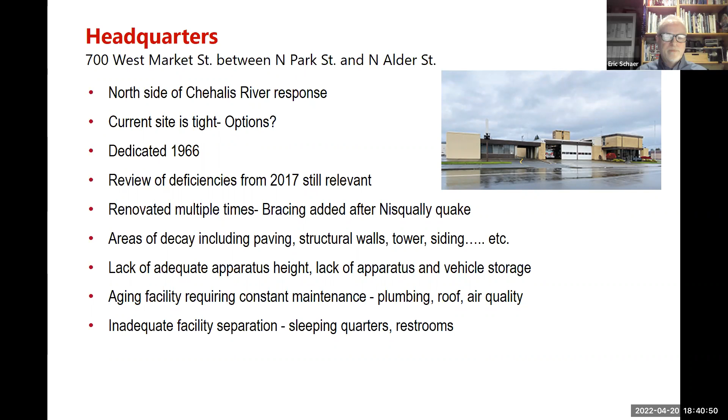The South Aberdeen Fire Station - this is the priority station for the department, so that's why I put that in bold green up there. It's my understanding if nothing else happens, they really need this one the most, so that's why that's there. This is a smaller station, of course, built in 1966 - both stations were built about the same time. This one has 3 bays, but it's actually only operating with 2 because there's workout equipment on one side of it.

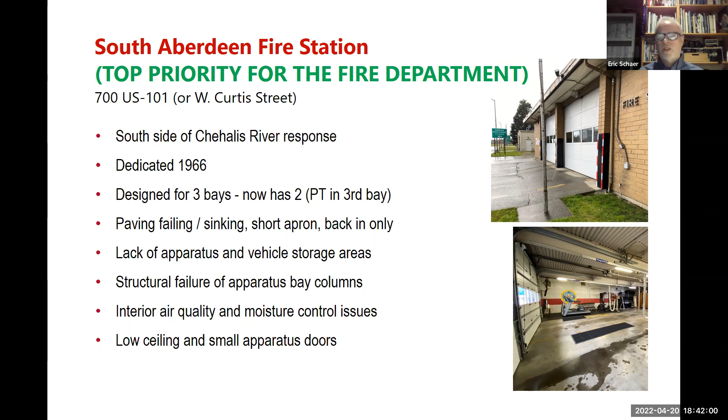There's lots of things happening with both of these stations that are showing age. I just listed a few of them - the paving, the apparatus have to back in, the front apron's very short, so by the time they clear the bay, they're already in the street, which is not something you really want to do if you can help it. Low ceilings - the apparatus doors and the ceilings in the bays are very short compared to a normal station these days, so the fire trucks actually have to be ordered and put together in such a way that they can fit in there.

I wanted to talk a little bit about this. It kind of scared everybody a little bit when we started this, but it turned out to be fine. So it was an educational process for, I think, everyone.

Our engineers got very involved in this, ended up talking to the state. We had a couple of meetings with them, and the code changed in the middle of doing this report, where they increased all of the tide lands and the requirements. So essentially what they were telling us is that where you see the yellow on the screen, there could potentially experience a 9-foot wave if the tsunami was triggered by a large enough earthquake. That was a little surprising to me, how far it came in, and the impact.

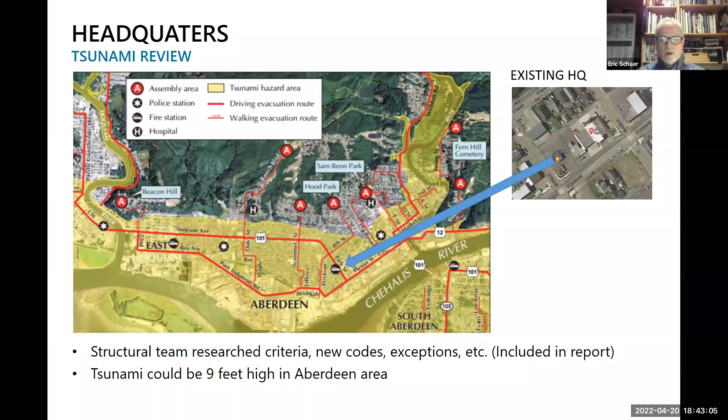And you can see where the fire station is there, and from the arrow, it's definitely in that zone. Next slide, Chief.

This is just showing the map of where the South Satellite Station is. Again, it's right next to the river. There is a wall there to protect it from flooding, of course, but this was the impact zone to that 9-foot wave. As I mentioned, last May, nearly a year ago, while we were working on this, the state adopted the new standards. So we were like, okay, are you serious? We have to try to design a fire station in Aberdeen to withstand a 9-foot wave.

Essentially, after we went through all of this with them, they said no, even though it's categorized as a 4 for a tsunami, they are allowing the local jurisdictions to just make that decision themselves, whether or not they really want to do that. It would nearly be not impossible, but it would be very expensive to try to design a fire station to withstand a 9-foot wave. You'd have to build a wall around the site.

The other interesting thing about this is that once the water comes in, it leaves after that, and so it's also going to be dragging things with it. So you have impacts of even a car slamming into your building and things like that. There's all kinds of stuff that could potentially happen.

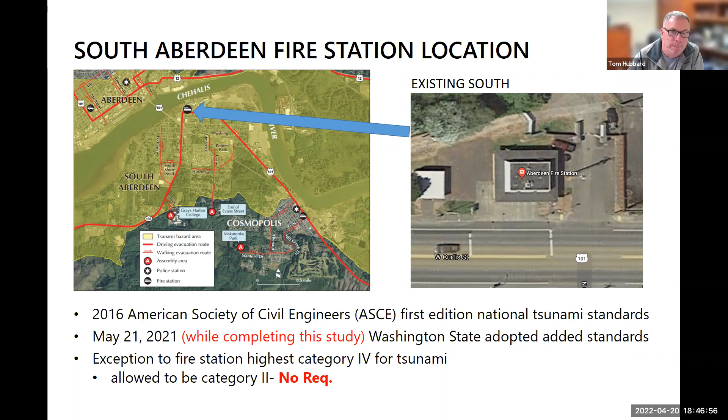Great, thanks, Chief. You can go to the next slide.

Again, as I mentioned, that was a very interesting process we went through. We talked about it for, oh gosh, it was probably 2 or 3 months. We went back and forth on what we were going to have to do. And the outcome of that basically came out that we didn't really need to do anything.

Fire stations are still category 4 in terms of earthquake design. So when you design a new station or do upgrades, they're essentially the last thing standing, as I always try to say, because they are the emergency responders. So let's assume you didn't have a tidal wave, the building would still need to be able to get the apparatus out of it in an earthquake to respond to your community and things like that.

So going back to the approach that we took, what were the takeaways? We toured the building, had a lot of good discussions with the fire department and the city. You guys as a city have been very helpful in us understanding some of the codes we needed to talk about, and location of the building. It's been a great process from my perspective in teamwork.

So we started looking at, okay, we've got some fire stations. What are they missing? What are some of the key things? There's some obvious things, given when they were built, advancements in technology nowadays. COVID kind of caused this, but we're all able to get on a computer and have meetings now. It's almost a little too easy. We're having multiple meetings a day now. We never used to do that.

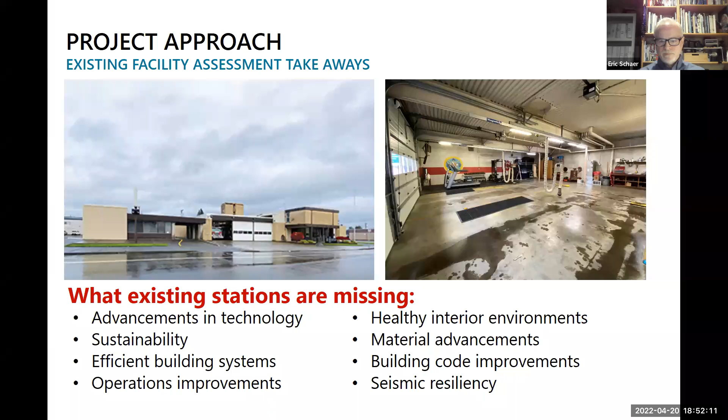So normally what we would do is we start talking about the needs assessment and what the fire department actually needs to do in their new facilities. But I wanted to quickly run through some of the current trends in the fire department, just so you guys all have an idea of what we talked about when we met with the fire department, to let them know what's going on out there and what things you might consider when we start the design. Next slide, Chief.

So I mentioned response, turnout. What are they doing? What gear do you have? How do you want this station to operate? We've done studies with other departments actually tracking time. If you get up and have to do certain things, how long does that take you? How long does it take to put your gear on and get in the apparatus? How can we help with that from a facilities perspective? Next.

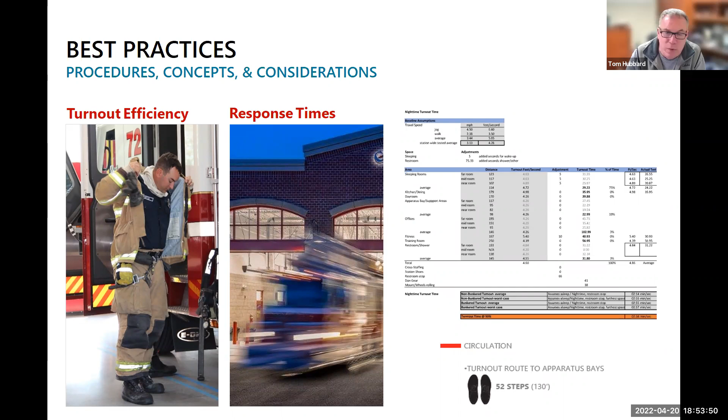There are NFPA guidelines on what we call turnout times, and it's different for emergency medical. It's a minute or less from the time we receive the dispatch to the time we're going out the door. For fire responses, because we're putting on our turnout gear, it's 2 minutes. So no matter what time it is, whether it's 8 in the morning or 2 a.m., when the tones hit, you either have 60 seconds or 2 minutes to get out the door, and we track that. The rating bureau tracks that, and it's a standard that we report on in our annual report. Thank you, Chief.

The healthy in, healthy out concept I mentioned, we've been doing it for probably 10 years, but there's a lot of departments that are not familiar with how this operates, depending on how old the facilities are and how sophisticated the department might be. And again, it's about controlling those contaminants.

When someone comes back from a call, it could be just something simple. I was talking to Chief Hubbard about this as well. My nephew's an EMS guy down in Vegas, and he holds back on the stories, but he's had to step in a few things when you go to a call, and even though he's not fighting fire, he's coming back. He'll try to wash his shoes off before he gets into things, but you certainly wouldn't want to wear those boots inside your house when you get home.

So there's just things that we want to provide: airlocks, places for people to wash off their boots, places for people to wash their hands, and then identify those spaces as we start designing the facility. Where are those? Where's the most convenient place that someone's going to be able to do that? Because old habits are hard to break. And if we want to make it as easy on the department as possible to get the crew to do something, a hand washing station right near the door they have to go in is going to be better, we assume, to get somebody to wash their hands or use a sanitizer station.

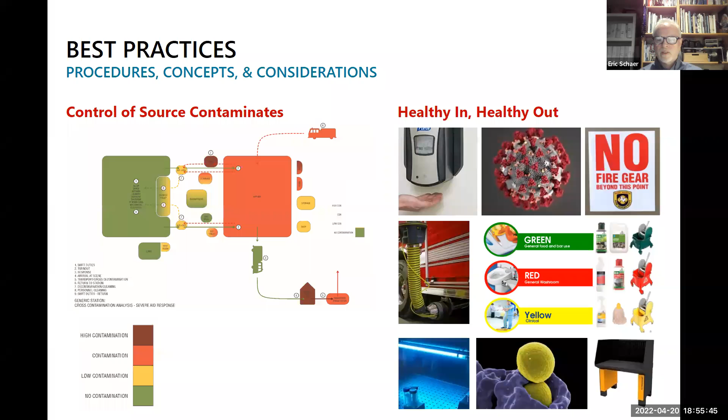The other thing in terms of health and wellness is something that seems very simple, but sleep health. You can imagine, as you probably know, these guys are getting called all day and all night. So you get woken up at 2 o'clock in the morning and then you don't get back until 4:30. You've got to be able to have good sleep or you're just not going to be able to function appropriately. So how can we better get it so that the crew can sleep better?

Well, one of those things, pretty simple: we started putting the lockers outside of the building, outside of the sleeping room. So if somebody comes on shift and they want to go work out or get their gear or something, they don't have to go in and wake the other person up. So there's some simple things like that.

Downtime, kind of preventing firefighter and emergency responder burnout, giving them places to just go hang out where they can decompress. It could be that they just came back from a really bad call and they just need to go hang out. So you'll see fire stations, almost every single one of them, have interior day rooms and outdoor spaces. They live there. It's kind of their house for a few days, and then they can go home and come back again. So there's a considerable amount of time as an emergency responder that you spend at these facilities.

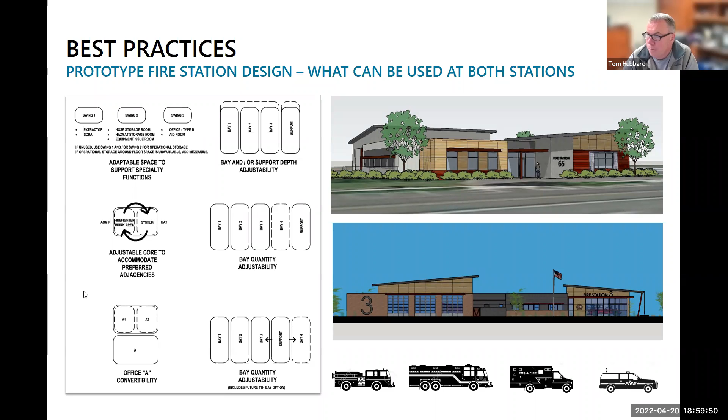Thank you, and that was my main point with this slide. You can go to the next one.

I mentioned too, this is up to you. I've been in a department one time where the chief, for various reasons, and he had good reasons, didn't want to tell anybody they were building a fire station in this particular spot because he didn't want to freak anybody out. Well, the sign went up and we had a public meeting, and we had to face the music. There were a lot of upset people who felt they weren't informed appropriately. So that's not really on us, but us and the fire department and you guys as a city have to make that decision.

But we've had a lot of experience sitting down with the public, having some fun meetings where we stick up little tabs on what everybody likes to see. We'll say, okay, this is the site that had to be picked and there's reasons for that, and we can explain that, but what do you want the outside of this to look like?

Well, what color do you want the fence? Because there's certain things you can do with the public where you don't really want them designing the inside of the fire station, but if somebody wants a white fence versus a brown one, or a certain kind of vegetation, things like that, we found great success in communicating with the public about what they can participate in. Then they feel a part of the process, so it works out really well.

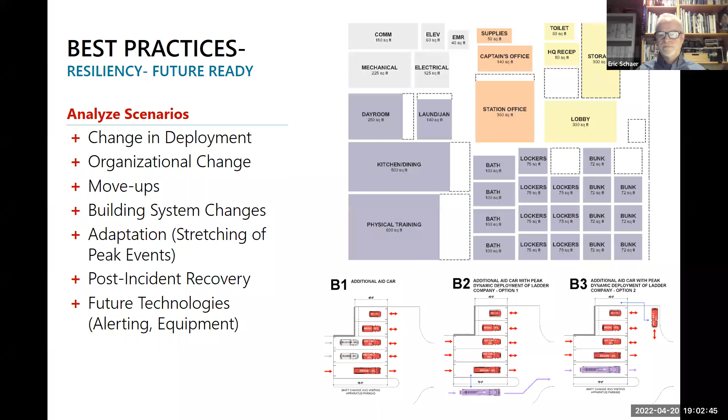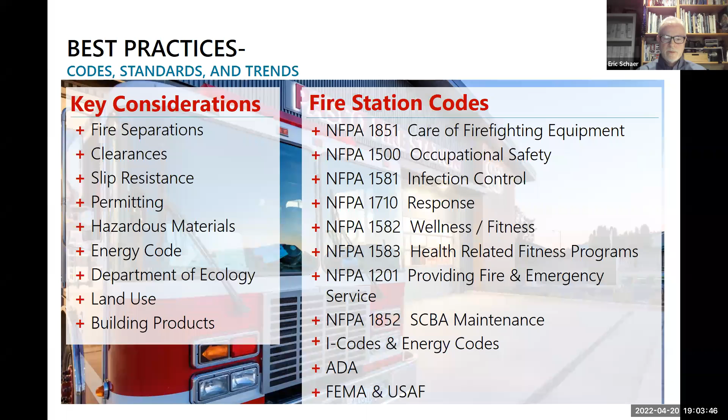There's new energy codes - the energy code just got increased this last year. There's certain things we have to do now with the outside of the building and the envelope that we didn't have to before. Most of the time we did it anyway, but now we have to. Slip resistance is required, and we can't let people fall down in the bays, so there's certain things we have to do with the concrete in the apparatus bays. Thank you, next slide.

Okay, so now finally, after all of that, we got together with the department and said, okay, we understand what you have, we understand how it's operating, we understand what the deficiencies are. We've had discussions about trends in fire service design. So, Chief, fire department, what do you need? What do you want to do with the new one? You're starting from scratch - let's talk about what's going to work for you moving into the future.

And so that's what this is - a small piece of the report we put together. We did this for all the different spaces we thought we'd need in the building, and came up with square footages based on our experience and trends and the needs of the department. We put one of these together for each of the facilities. So if you can go to the next... anyway, before you do that, sorry, if you could back up.

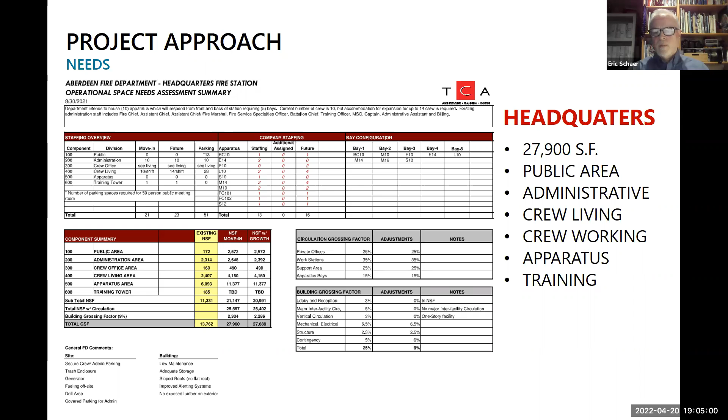We came up with 27,900 square feet for the headquarters - that was the number based on all of those needs. For the priority station, the south station, that ended up being about 12,135 square feet, calculated based on all of those needs. Next slide.

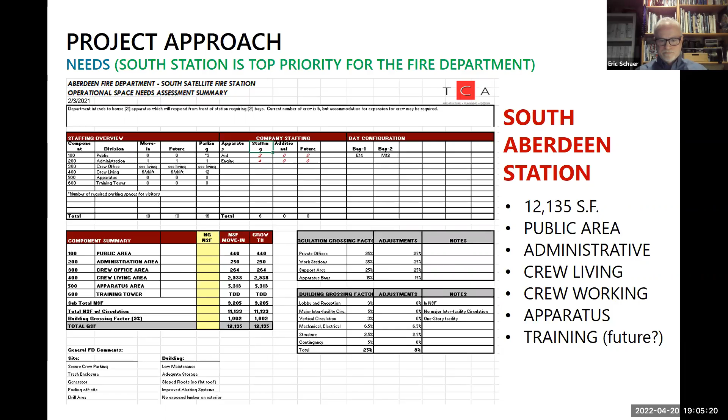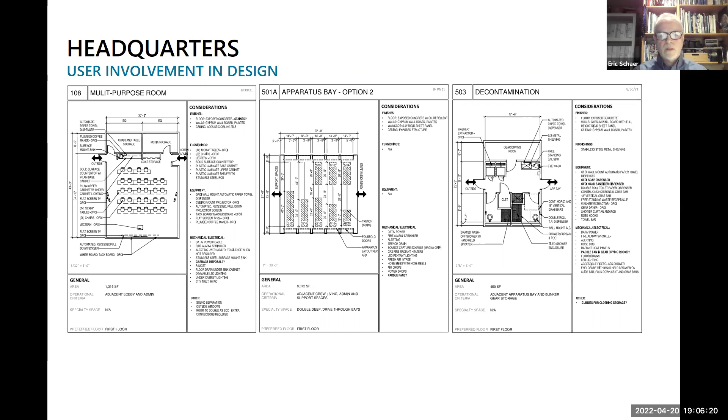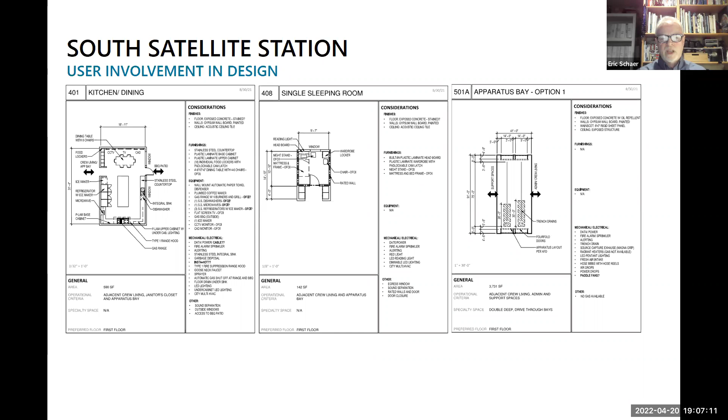We talked about kitchen, dining, and day rooms and how those were going to be put together. Some stations have them all in one big room. Talking to Tom and his crew, we decided they didn't want it all in one big room, that they needed some separation between the kitchen and where the chairs and the day room would be. So that's how we ended up doing it.

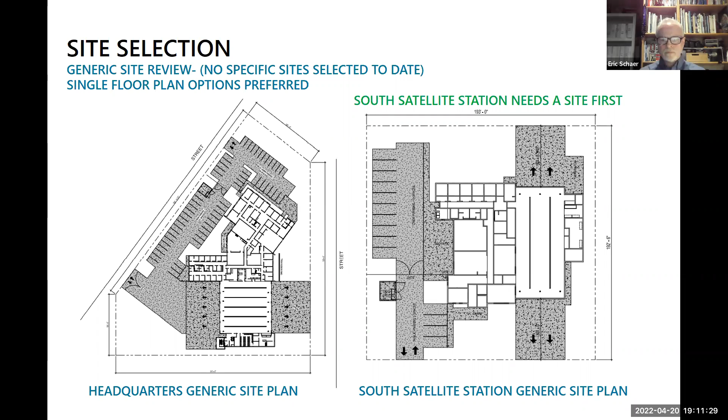Talking again about site selection and what you might want to consider when you get to that point: ranking things. So if you have a site, let's say you picked out 3 or 4 different possible sites, you go through a process of ranking them, because how are you going to decide? Unless it's pretty obvious - sometimes there's really only 1 or 2 sites that fit the building, that allow the operation to occur, or that are in the response zone that it needs to be in.

Certainly it'd be great if you could just go 20 miles away and put the station there because the land's cheaper. But the chief can't do that, because then the response times and supporting the community don't work.

So you have to have a process by which you can explain why you picked that site. That gives you a defensible process you can show to the public. If somebody says, well, why didn't you pick Frank's site down the street, he's selling his house, why didn't you do that - you already have something to show: because XYZ, we went through a process and understood where our response needed to be and what we needed to have.

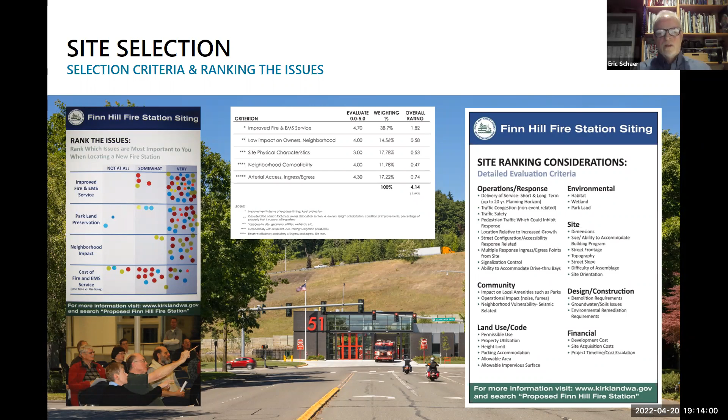So now we go to taking those spaces that we went through in the needs assessment. Now we have all those diagrams, so let's turn them into floor plans. We take all of those little spaces and put them together like puzzle pieces. We meet with the department and come up with a plan.

All of those kinds of things are super important to make sure the process is evolving and operates appropriately. Somebody comes into the lobby - what do you want to have happen? Does that person need a place to sit down? Do you want them to go right into a restroom, or do you want some sort of control over that? There's all kinds of discussions like that we had.

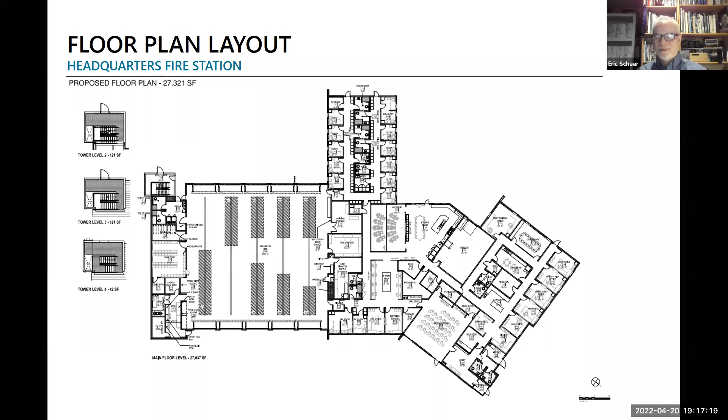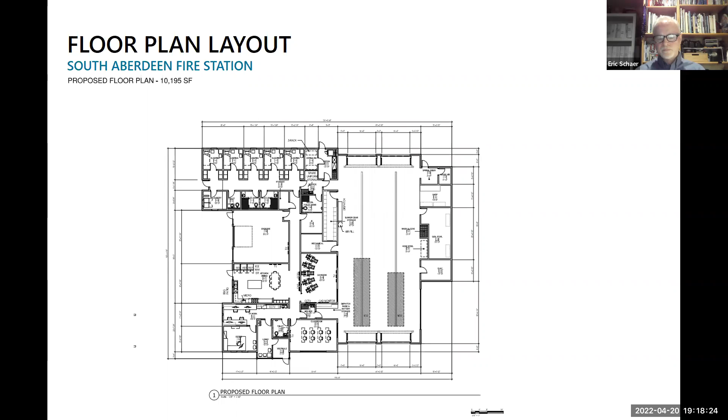That's it for that. So then we actually look at the massing of the building while we're doing the floor plan, because otherwise you're faced with trying to solve a problem and moving spaces around to fit the massing. So even though I'm showing this separately, these were being developed as we were kind of developing the plan.

But we solved the problem. We got the plan to work. And I think if you did this, it would be fine. But this was one of the things — this would be really simple if we were able to do flat roofs. We could do all kinds of just little boxes and make it work, but we knew we couldn't do that. Tom's shaking his head, no.

So anyway, that was the resolution we came up with for that particular project, is what you see there. And that's about as far as we got with it. We didn't intentionally spend a bunch of time and money trying to come up with dimensioning it, and those could potentially be Hardie panels. We talked about trying to mimic some of the industrialization that Aberdeen has had over its history. We talked to the department about what the aesthetic of this building might be.

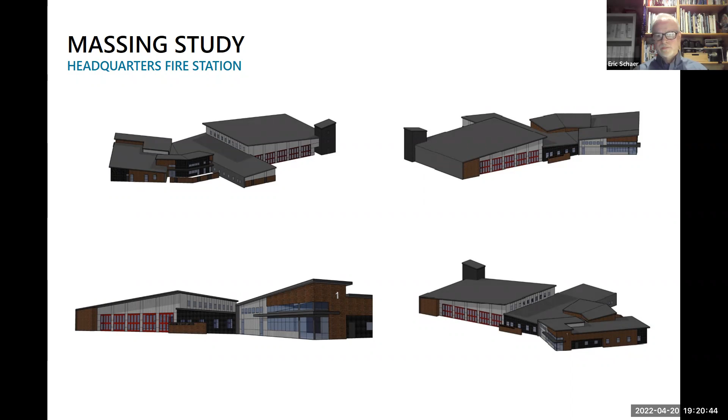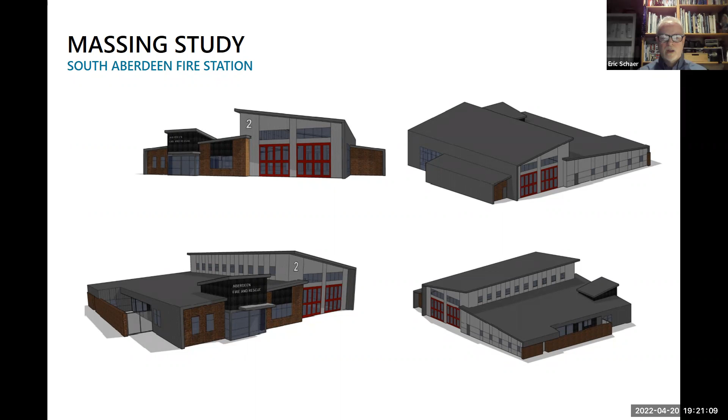The South Station, as you can see, similar materials. We talked about having a way to standardize things, including the roofing, the siding type, the doors, the hardware, all of those would be standardized. This one was a little easier to work with just because of the size of the project, and I think it turned out pretty good.

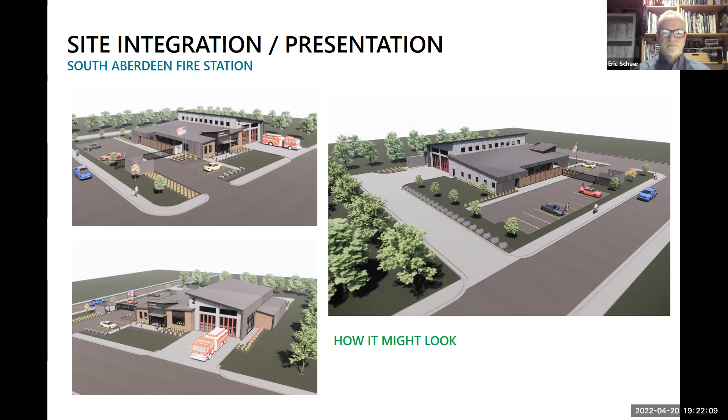That's a view kind of coming in to the front of it.

So after we did all of that and put the plans together, we had the massing, we told the estimator what materials we were looking at. He went through a very detailed process of what this was going to cost at the time we did this estimate, back in October of last year. Escalation at the time was around 4.5%. It just depends on when these things get bid. Escalation took a huge jump in the last couple of months, but we're hoping that's going to calm down a little bit, and a lot of that has to do with supply chain, it's really difficult to get metal right now and some other things. So that was the number we came up with.

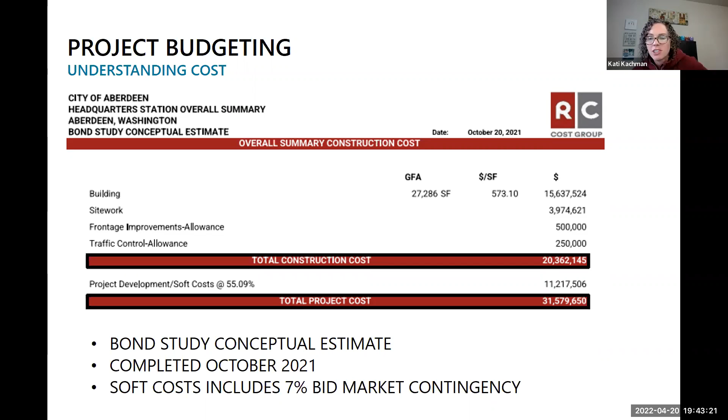Dan, did you have a question? Go ahead.

Sorry. Yeah, I know you guys didn't do this much work without having some serious discussions and thoughts about location. I'm wondering if we need to plan for an executive session so the chief can share his thoughts on what we ought to be thinking of in terms of next steps, because we're not going to do anything if we don't have a site. It's clear they don't want to talk about it in the workshop, but there must be some thoughts on that, and I would welcome being able to hear about that.

My other thought was, if we're going to build in the inundation zone, what does that look like? If we're all going to flee to high ground, but everything below us is destroyed, how do we help people? Whether it's an earthquake—if we build an earthquake-proof building, yes, it'll still be standing, but everybody around us will be coming to us for help. But if we're in the inundation zone, how do we help people if our building is toast?

So that goes to disaster preparedness and disaster response, and it's no different today than if we were in a brand new station, same for the police. If we have a Cascadia event, a 9.0 Cascadia Max as they call it, where we have 15 minutes notice to the coast and 45 minutes to us—our response plan, and everybody on this meeting and the public, once the shaking stops for the first time, you need to head to high ground. That is our plan as well, because there is no time for us.